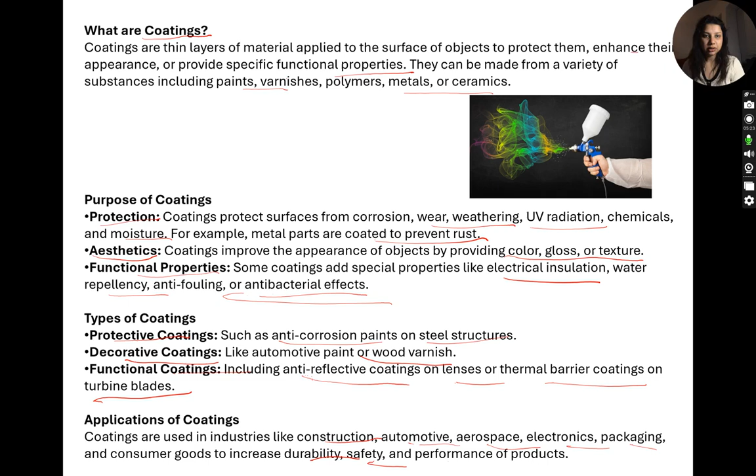So this is the basic overview of why coatings are performed and how different types of coatings can be done. Let us take some questions on these kinds of coatings. First: which property is most critical for a coating used to protect electronic components in harsh chemical environments? The options are high thermal conductivity, resistance to chemical solvents, electrical conductivity, or optical transparency. So which kind of coating can be used to protect electronic components?

Okay, so this is not that typical question because if you look at the options, we can easily eliminate some and keep the most relevant one. I got two answers, which say it's B, resistance to chemical solvents. And yes, it's true, resistance to chemical solvent. Now look at the other options like high thermal conductivity, electrical conductivity, or optical transparency.

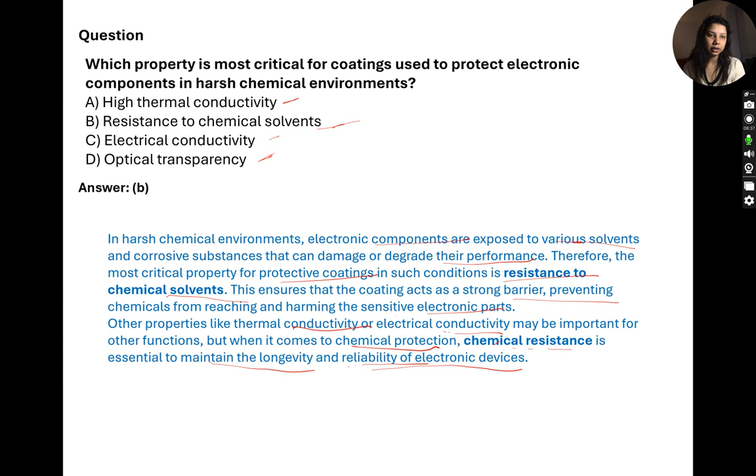That's why chemical resistance is the basic minimum key requirement to protect electronic components in harsh chemical environments. Other types of coatings can also be performed depending on the requirement one has in that case. I hope this is a simple question and everyone gets through it. We've taken this type of question in the last session also, like most of the polymers we've read about in which these coatings can protect electronic items from the environment. So let's move forward to the next.

So, acrylic coatings - this is very important. If you look at the structure of acrylics, they can generally be made from acrylic acid or methacrylic acid, methyl methacrylate. You've already heard of MMA, which can be used to form PMMA.

PMMA is a very common and well-known polymer, generally used because of its shiny appeal or the transparency it has. Acrylics refer to a family of synthetic polymers derived from acrylic acid, which has a double bond and an acidic group. This double bond helps with the reaction mechanism - we've read about polymeric reactions, the free radical reactions. So these kind of polymers generally undergo radical reactions, free radical reactions.

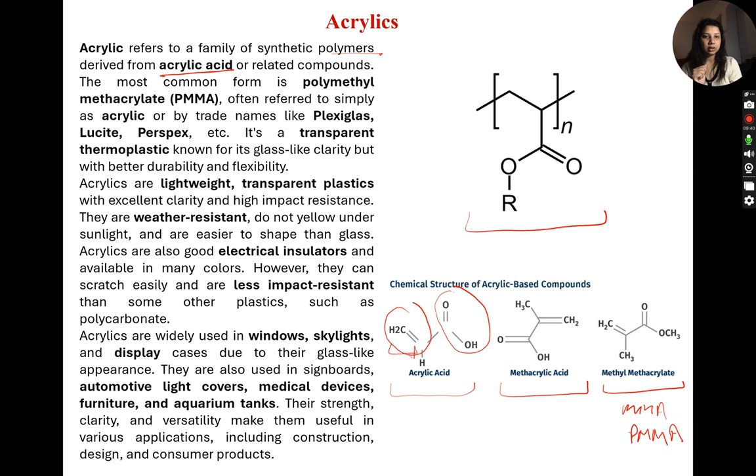The most common form is polymethyl methacrylate, often referred to simply as acrylics or by trade names like Plexiglas, Lucite, and Perspex. It is a transparent thermoplastic known for its glass-like clarity but with better durability and flexibility. Acrylics are generally lightweight - transparent plastics with excellent clarity and high impact resistance.

That's why, because they are transparent plastics with transparency, these type of polymers can replace glass. Glass is not lightweight and not that flexible, so it can break easily. So these kind of polymers can replace glass easily.

If we look at other properties, they are weather resistant, do not yellow under sunlight, and are easier to shape than glass. Acrylics are also good electrical insulators - this is an important property also - and are available in many colors.

However, they can scratch easily and have less impact resistance. Glass cannot be scratched, but it can shatter. Transparent polymers, on the other hand, can be scratched very easily - we've generally seen these kinds of scratches on transparent sheets. Some other plastics such as polycarbonate, which is a very tough polymer we read about in the last session, are more impact resistant, whereas PMMA and acrylics have much less impact resistance.

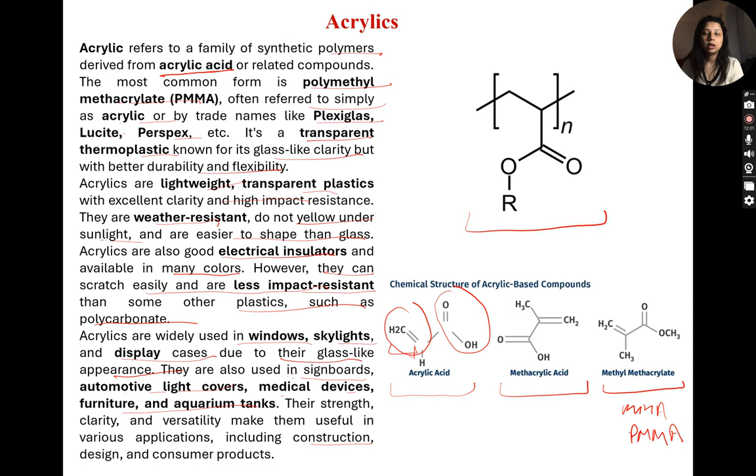Starting with the first question: acrylics' weather resistance is mainly due to its ability to withstand what? We have just read that acrylics are weather resistant, so now they are asking why - because they can withstand high temperature, UV radiation, electric currents, or strong acids. Which among those options can they withstand? That's why they are weather resistant.

I'm expecting some answers in this case.

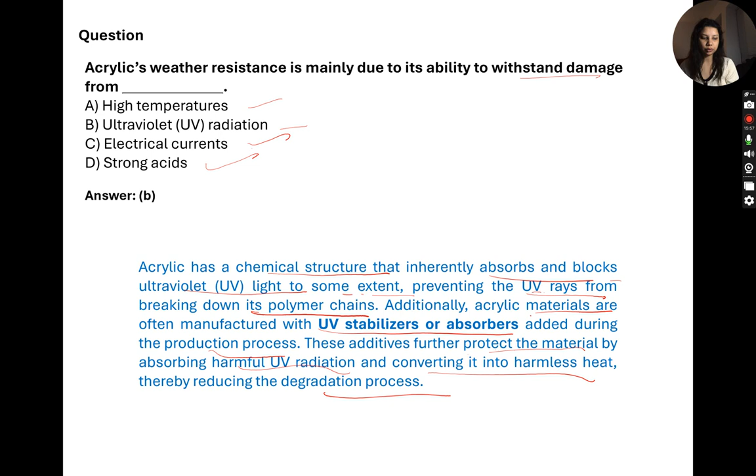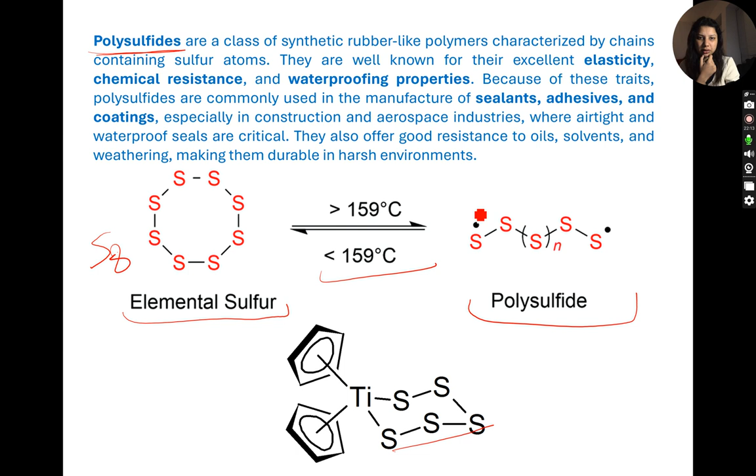If you look at elemental sulfur, which is cyclic, under heating conditions this can be turned into a structure like this, which can form polymers, polysulfides. Because of the two-pronged structures, this kind of moiety can attach to it, forming the structure of polysulfide.

Generally, it is a class of synthetic rubber-like polymers characterized by chains containing sulfur atoms. They are well known for their excellent elasticity, chemical resistance, and waterproofing properties. Because of these traits, polysulfides are commonly used in manufacturing sealants, adhesives, and coatings, especially in construction and aerospace industries, where airtight and waterproof seals are critical.

They also offer good resistance to oil, solvents, and weathering, unlike acrylics, which don't provide good resistance to these kinds of oils and solvents. Polysulfides, on the other hand, can provide good resistance to oil, solvents, and weathering, making them durable in harsh environments.

So their drawback can be overcome by these types of polysulfides. Being rubber-like, they generally show elasticity, chemical resistance, and waterproofing properties. That's why they are used as sealants in bigger industries like construction or aerospace. In industries like aerospace, we require chemicals or materials with very high impact, higher properties, because there we cannot take any risk with the cost itself.

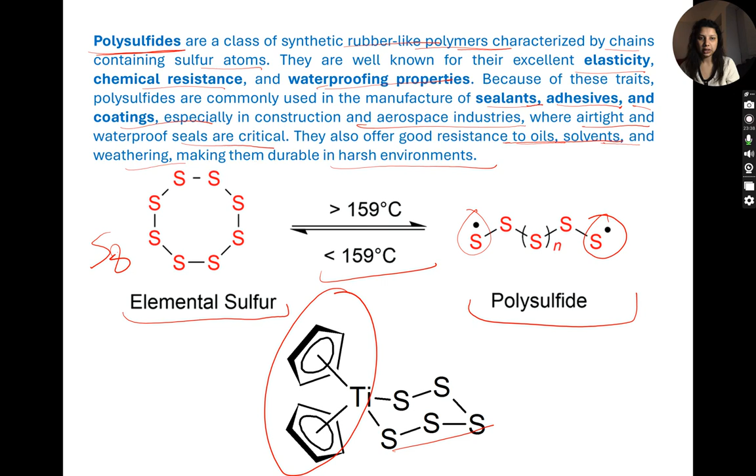Okay, so let's take the questions on polysulfides. Starting with the first question: polysulfides show good resistance to which of the following? Water and oil, strong acids, high temperature above 500, or UV radiation? So polysulfides show good resistance to which of the following?

Yes, now this is because we just played the last slide. This is now an easy question. This is not that tough.

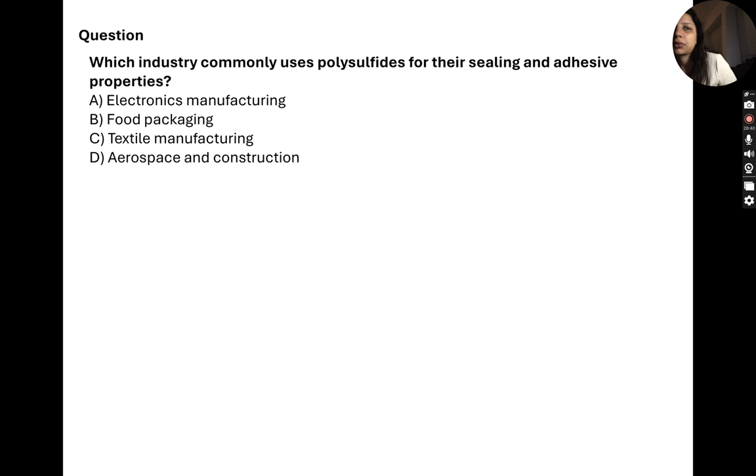Okay, so the answer is D. It says aerospace and construction because polysulfides are highly valued in aerospace and construction industries due to their excellent elasticity, chemical resistance, and waterproofing capabilities. Food and textile do not require such high impact polymers, and for electronics, different types of polyurethane, silicones, and epoxies can be used there.

I hope till now this question is clear to everyone because we are talking about different types of polymers and their properties. If anybody has any issue or concern regarding this, please text me in the chat box.

Okay, so let's move forward to the next question. It's not related to polysulfide. The question is: how does temperature generally affect the dielectric constant of most material? It remains constant regardless of temperature, it increases with temperature, it decreases with temperature, or it fluctuates randomly.

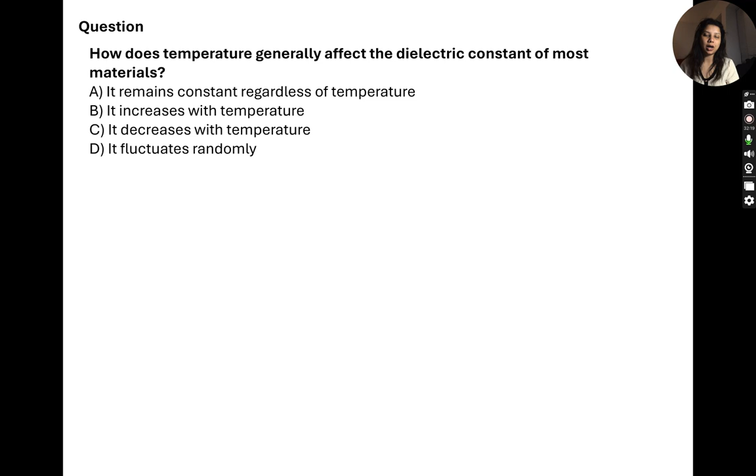Okay, so here interestingly I got two answers: either it increases with temperature or decreases with temperature. So let's first understand what is dielectric constant and how it is related to temperature. The correct answer is B, it increases with temperature.

If you look at the explanation: the dielectric constant, also called relative permittivity, is a measure of a material's ability to store electrical energy in an electrical field. It tells us how much electric charge a material can store compared to vacuum. A higher dielectric constant means the material can store more electrical energy. It's a dimensionless number with value greater than or equal to 1. Vacuum has a dielectric constant of exactly 1. So if any component has more than one dielectric constant, that means it can store high electrical energy. Materials with high dielectric constant are used as insulators, in capacitors, and other electronic components to improve their efficiency.

For most dielectric materials, their dielectric constant generally increases with temperature. This occurs because rising temperature increases the mobility of polar molecules and dipoles within the material, allowing them to align more easily with an applied electric field. As a result, the material's ability to store electrical energy - permittivity or dielectric constant - improves. So that's why the dielectric constant generally increases with temperature.

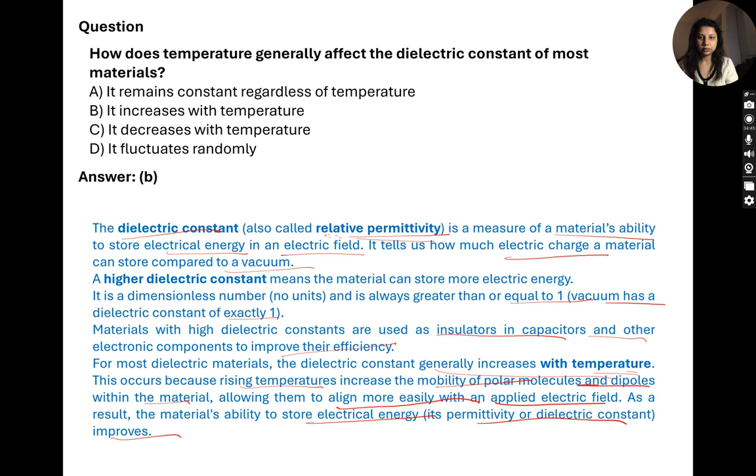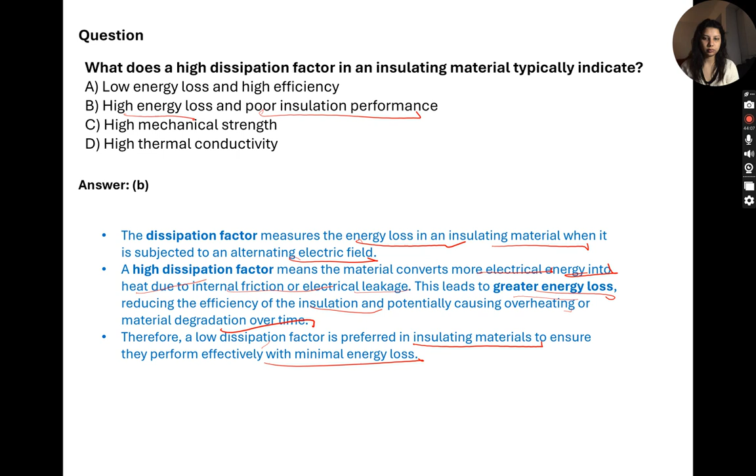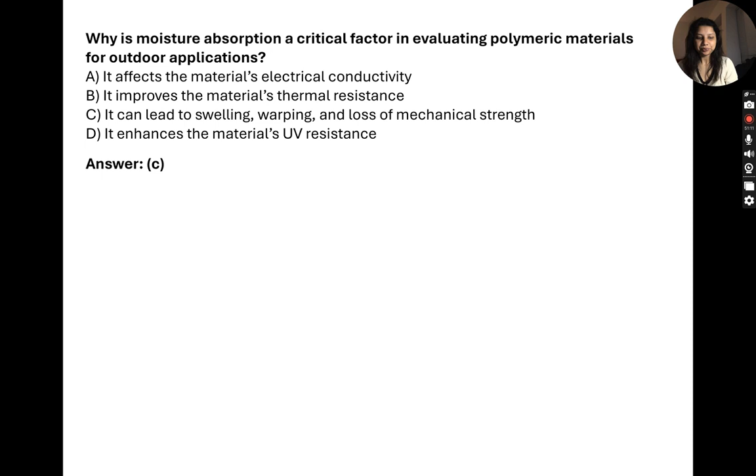Okay, I got two answers, one saying it can lead to swelling, warping, and loss of mechanical strength. Let's see, yes, it's C. Moisture absorption is a critical factor for polymeric materials used outdoors because when polymers absorb water, they can swell or change in dimensions, leading to warping or deformation. So they can swell because of the moisture, that's an important factor. These physical changes can compromise the mechanical strength and structural integrity, causing it to weaken.

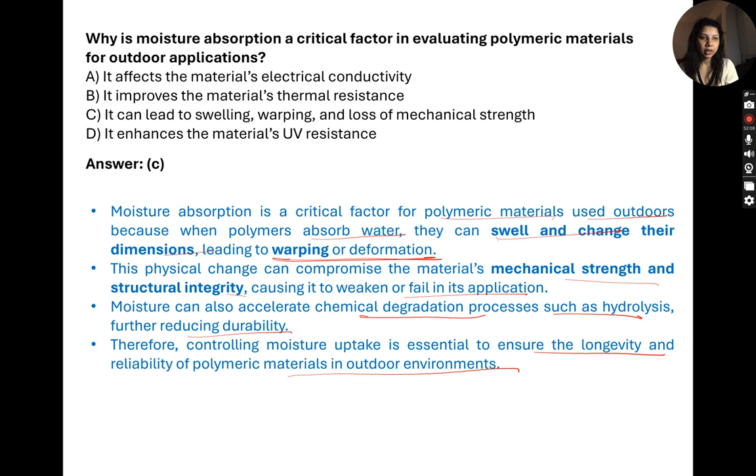Moisture can also accelerate chemical degradation processes such as hydrolysis, further reducing durability. Therefore, controlling moisture uptake is essential to ensure the longevity and reliability of polymeric material in outdoor environments. So the correct option is C, because it can lead to swelling, warping, and loss of mechanical strength. That's why moisture absorption is a critical factor in evaluating polymer materials. We should look for materials which cannot absorb that moisture, which can resist the moisture, so that it can be used in outdoor applications in a very good form. I hope this question is clear to everyone, so let's move to the next one.

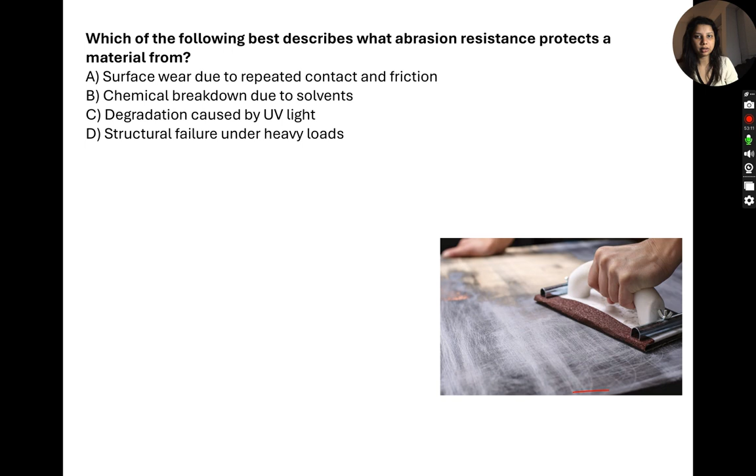Okay, I got two answers, which say A, surface wear due to repeated contact and friction, and it's correct because of the photo we can see repeated contact and friction. That's how abrasion resistance can protect material. Abrasion resistance refers to a material's ability to withstand surface wear caused by mechanical action such as rubbing, scraping, or friction. When a material has good abrasion resistance, it can endure repeated contact with other surfaces without losing its integrity or surface quality. This property is essential in applications such as flooring, tires, or machine parts where constant friction is present.

Like you can see that flooring, we can walk on the floor, and the tires, which are repeatedly in contact with the road, and the machine parts, which move continuously. That's how this abrasion resistance came into picture, because we need materials which can show good abrasion resistance.

Option B and C refer to chemical and UV degradation, which are different modes of wear, and D refers to mechanical strength with load, which relates to structural integrity rather than surface wear. So structural failure under heavy loads is a different property. This is not abrasion resistance.

If we talk about abrasion resistance, it means direct contact or continuous contact with the surface itself. And that's how we can measure the abrasion resistance. We need such materials which can show better abrasion resistance, depending on where we use those materials.

Okay, this is important. So in this session, we have covered many new concepts apart from just the introduction to polymers, different polymers and their properties. We have read about dielectric constant, dissipation, power factor, abrasion resistance, moisture absorbance, and such properties which are very important for the application.

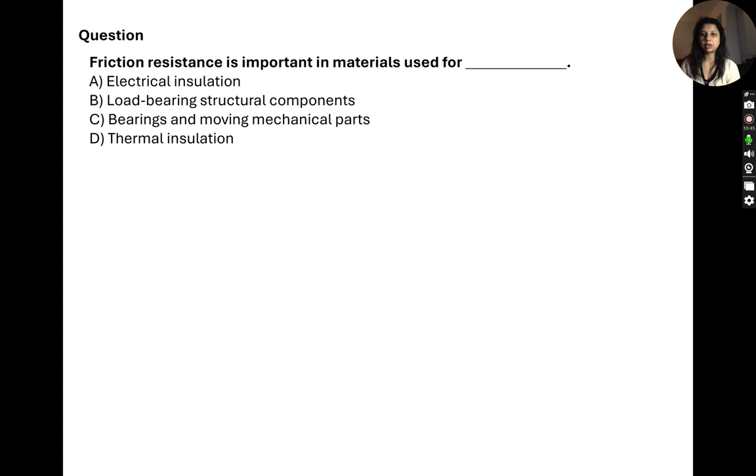Okay, so I got two answers which say it's C, bearing and moving mechanical parts. And let us see, yeah, it's C. Because frictional resistance refers to the material's ability to withstand sliding or rubbing forces.

You can have friction between sliding or rubbing without excessive wear or damage. This property is especially crucial in bearing and moving mechanical parts, which are continuously moving, where continuous contact and relative motion occur between surfaces. That's how high frictional resistance helps these components maintain their functionality for a longer time.

And that's why when we add oil or some grease into the substance, it decreases the frictional resistance in between. Machines work continuously and their parts move continuously, and if we add some oil or something, they can reduce friction, and that's how the friction resistance can be improved, or can be decreased.

In contrast, electrical insulation, load bearing, and thermal properties focus on other properties such as electrical resistivity, mechanical strength, and heat resistance, rather than frictional resistance. Frictional resistance comes where we talk about properties like bearing and moving mechanical parts.

So I hope this is clear, what is frictional resistance. Okay, then let's move forward to the next topic.

So this is the last topic of today's session, the natural fiber reinforced composite materials. First of all, we need to understand the term natural fibers. Natural fibers are materials such as jute, hemp, flax, sisal, coir, cotton. These are materials which are present in nature.

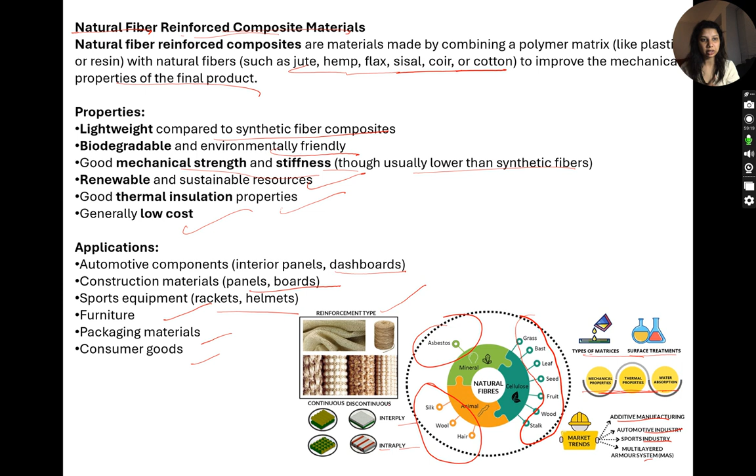Nowadays this is a hot topic for research, where people are using different types of natural fibers and their different components for reinforcing, to show that the mechanical properties or thermal properties are increasing very much. And that's how, let us take some questions on this topic.

The first question is: natural fiber reinforced composites are favored because what can they offer? They are heavier, have high excellent resistance, offer lightweight construction and good impact resistance, or are completely waterproof and resistant to all chemicals. So why are these natural fiber reinforced composites favored?

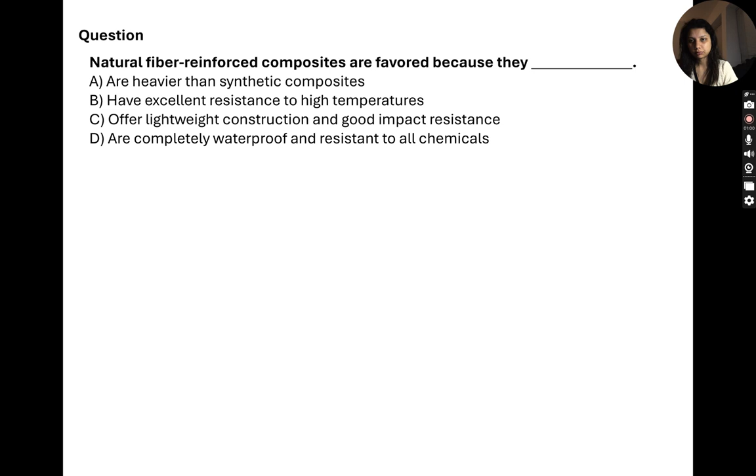Okay, so here I got two answers. Let's say this offers lightweight construction and good impact resistance, and correct. Natural fiber reinforced composites are popular because they combine the benefits of lightweight and good impact resistance, making them suitable for applications like automotive parts, construction, consumer goods. Compared to synthetic fibers, they are generally lighter, which reduces overall weight in products and improves fuel efficiency in vehicles. If you look at the other options like heavier, no, they are lighter.

Have high excellent resistance to high temperature? No, sometimes they cannot provide that resistance, and they are not that waterproof resistant. We can make them waterproof by chemical treatments or something, but they cannot be completely waterproof. The only correct option is C, which offers lightweight construction and good impact resistance to the materials.

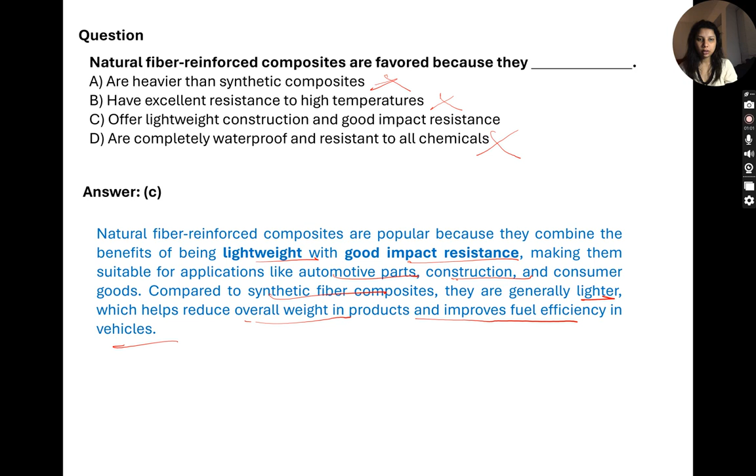Okay, let's move forward to the next question. One limitation of natural fiber reinforced composites is what? They are highly resistant to moisture, they generally have lower strength and stiffness, are commonly used in aerospace, and are non-biodegradable and environmentally harmful. By looking at the options, I can simply and easily say what is the limitation of these natural fiber reinforced composites.

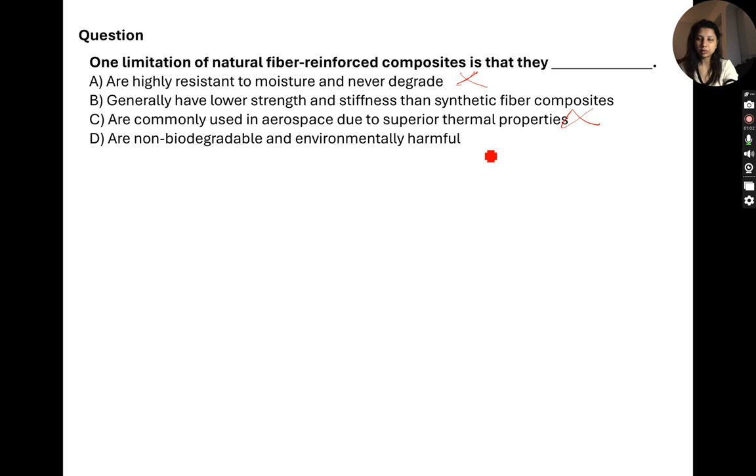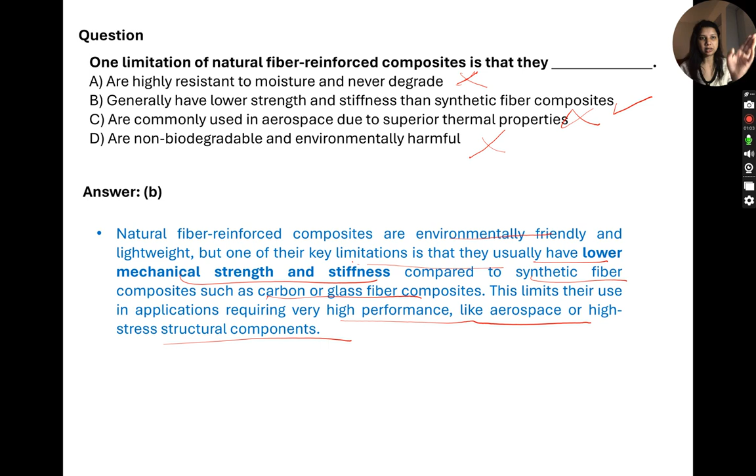By looking at the options, you can simply eliminate others like high resistance to moisture, no; not commonly used because in aerospace they are biodegradable. So the only correct option remains B: these reinforced composites are environmentally friendly and lightweight, but one of their key limitations is that they usually have lower mechanical strength and stiffness compared to synthetic fibers, such as carbon or glass fiber. This limits their use in applications requiring high performance, like aerospace and high-stress structural components. So we cannot use these natural fiber reinforced composites there, but in other applications or industries where we do not require such high impact or properties in polymers, we can use such natural fiber reinforced composites, considering environmental safety issues and concerns.

Okay, so it's the last question. Which environmental factor is a major cause of natural fiber composite deterioration? What is that environmental factor? Moisture, humidity, conductivity, tensile strength, electrical insulation - can these cause natural fiber composite deterioration?

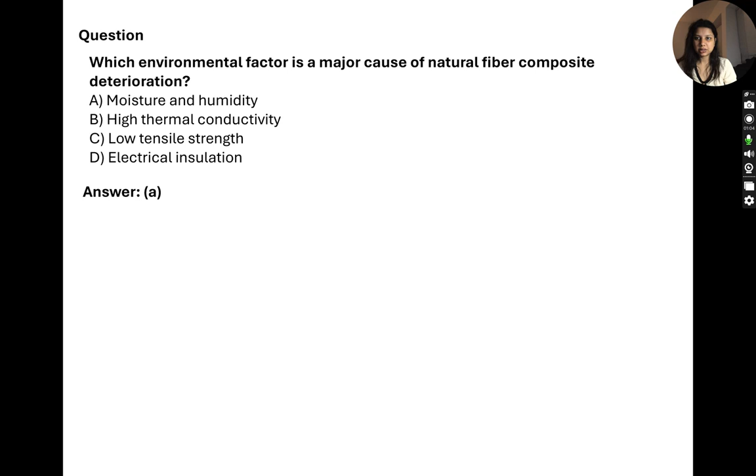Okay, let's see. So it's A, moisture and humidity. Moisture and humidity are significant environmental factors that contribute to the deterioration of natural fibers. Natural fibers are generally hydrophilic, meaning they tend to absorb water. This moisture absorbance can lead to swelling, fiber-matrix interface weakening, microbial growth, and ultimately degradation of mechanical properties. High moisture content can also cause dimensional instability and accelerated chemical breakdown, reducing the durability of composites, especially in outdoor humid environments.

They don't have high thermal conductivity; on the other side, they can be used for insulation. They don't have low tensile strength - they can show different types of tensile strength, and electrical insulation is also not the correct option. The only correct option is moisture and humidity, because that is the important factor for this deterioration. You can see that if we store any agricultural or similar material in humid conditions, microbial or fungal growth can start very easily because of the moisture and humidity. That's why we need to think about and treat these kinds of fibers before using them, and that's how the natural fiber reinforcement composite can work.

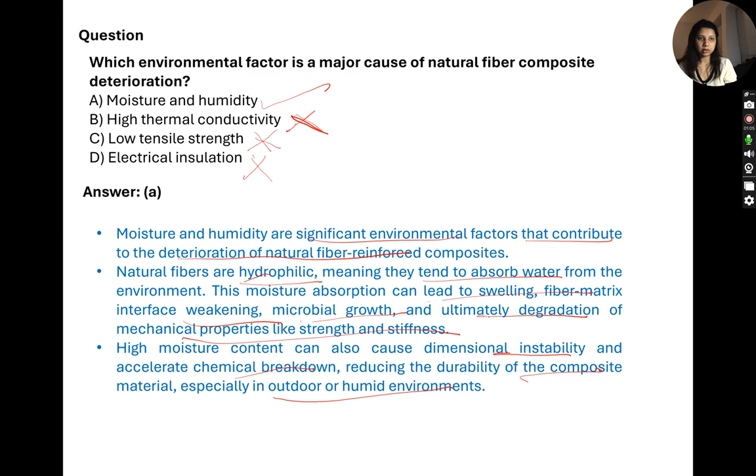I hope this question and this topic is clear to everyone. So yeah, that's all for today. I hope the questions are very much clear and easy. If anybody has a problem, I can repeat it again.